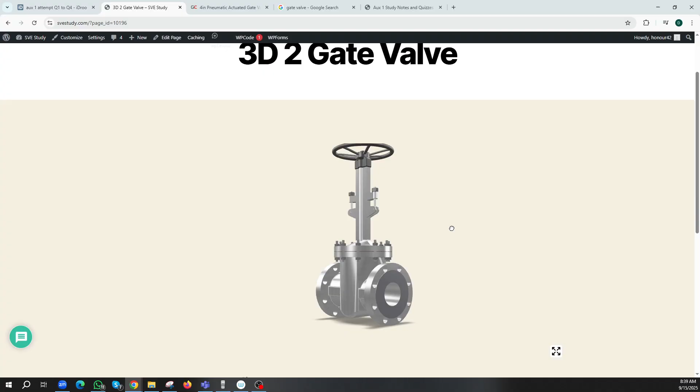I do have a gate valve on the website. You guys can't actually access this, I haven't made it public just yet. I put these 3D models up a little while ago to help us out, and I'll make them public so you can have a look. This is a gate valve. It may not be the best diagram or 3D model because it has nothing on the inside, and we really want to see the exploded version. So I didn't make it public. Also, not sure this is really a gate valve, even though it looks like one.

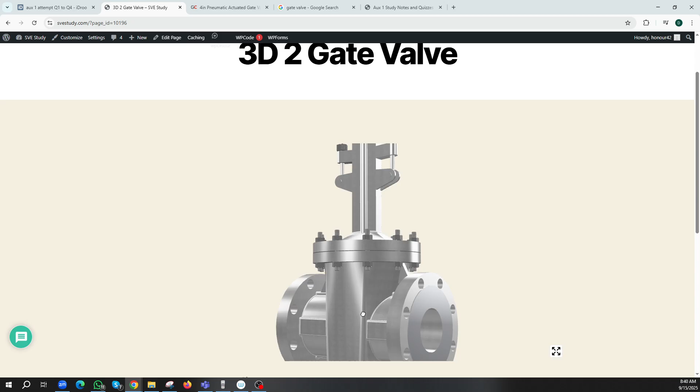The idea of a gate valve is you turn the handle and it will lift up a gate inside of here. We can't see a gate inside, so that's pretty bad. Also, is there enough space for the gate to even rise? That's my question really with this model. Not sure it's a very accurate model, so I could look around and find a slightly better one.

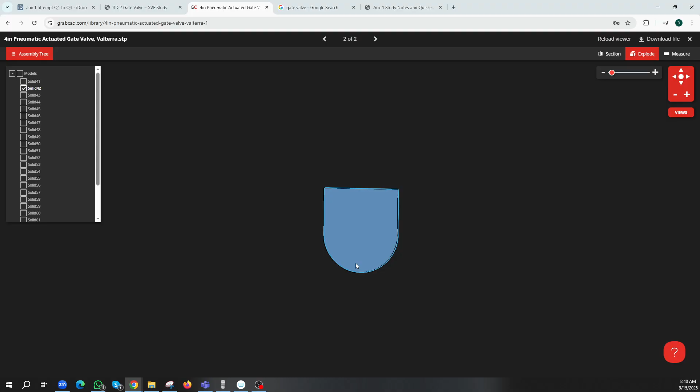Here's another one, looking at CAD drawings online, and this one's a little bit better. You can actually see it has a gate inside of it. There he is, a little gate plate. I can remove the outside so we can see that, it's literally just highlighted there. That will be the gate plate. If I can isolate that guy. There he is, okay, right. Why is it not that shape that it could be?

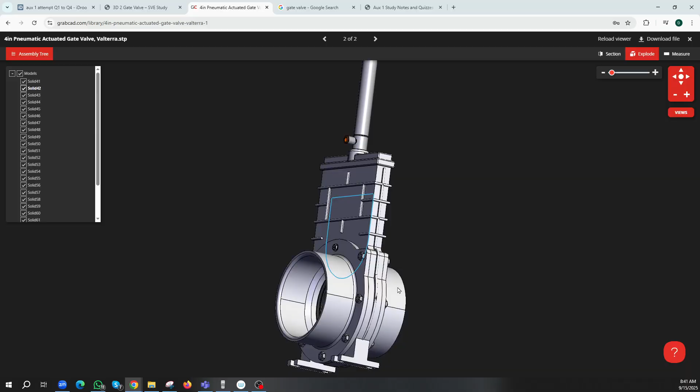You can see what's going to happen is, as this is a pneumatically actuated gate valve I think, as the pneumatic actuator actuates, it's going to pull this plate upwards, the gate up and down inside its little housing, to stop the flow of the fluid and to allow the flow again to pass through.

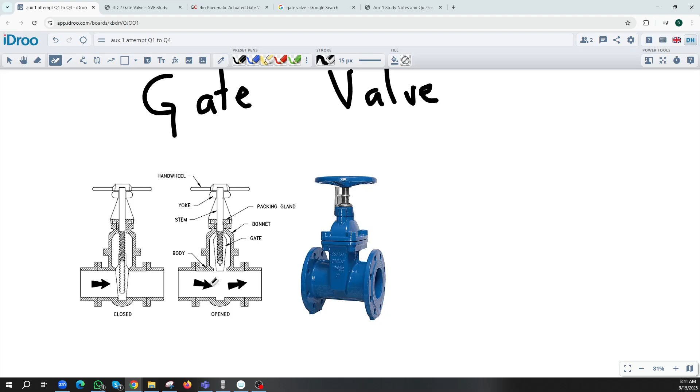If we go online and just quickly Google one, I can find quite a few. I'm going to pick out this one, I'm going to basically copy this for my diagram, but we'll try and do it reasonably quickly as well. So here's a cross section. In the exam, it does say draw cross sections. What do you mean by cross section? Do you mean cross section going longitude or latitude, across it, or which cross section? Obviously you've got two different types of cross section. I think we're going to do it like this, just cut it across so we can see the pipe work and everything. The question is, how do you draw this reasonably accurately, reasonably quickly for exam time?

So let's see if we can do that for a gate valve. I'll leave that guy on the side. It looks like, same as when I was looking on the website, this has just enough space to lift the gate up and nothing else. There's differences between rising stem and not rising stem, and we can go into that a little bit later, but the questions don't really ask that on the paper, it's just draw them, right?

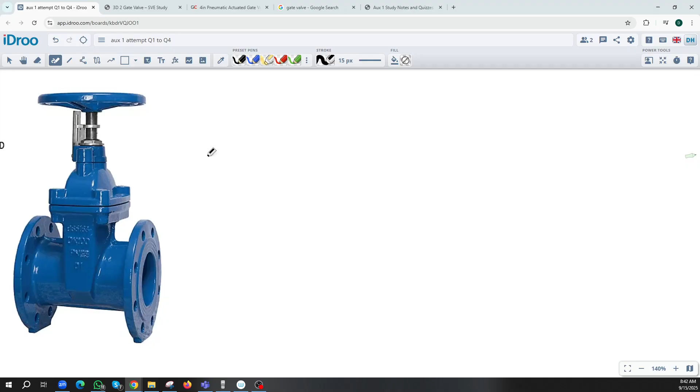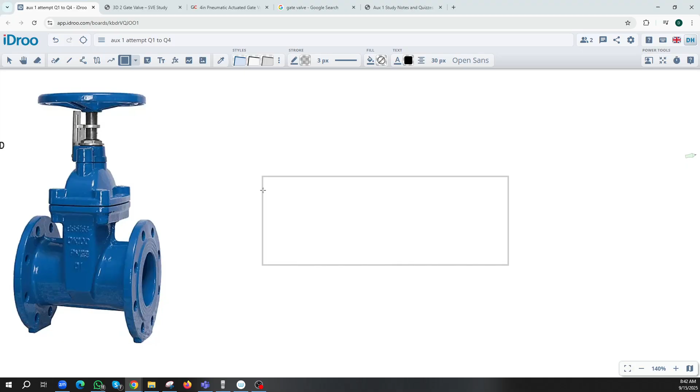So I'm going to be using sketch lines. Of course, I am doing this on a computer and not by hand, so maybe I've got some advantages. I can erase things, delete things, rub things out a little bit easier. Maybe I'm cheating a little bit by doing it like this, doing it by hand might be a little bit harder. I'm going to draw the pipe work in to start with. So here's my pipe work, this is the flow of liquid, we'll go through here. Then we're going to draw the valve body on there, just to give me some guidelines to work with.

I suppose using a ruler on all this could make it a little bit neater, couldn't it? Let's get some grid lines on here, maybe that'll make life a little bit easier. Oh, I don't know, I like it without. Okay, let's just keep it like that.

Okay, I'm going to draw the pipe work here, and then the valve body. This will give me space to put the valve inside. As I was talking about earlier, we want to be able to put a gate in here, and the gate has to have space to be lifted up and put back down again.

Maybe I can make this a little bit thinner, maybe. Again, cheating, this is just my guidelines, something like that. Let's get the gate in there if we can.

So the gate will have to block this whole section off. So I suppose it wants to be a bit wider, a bit longer than the pipework itself, so it's able to be lifted up. I want to make sure there's enough space for it to actually be completely removed. Maybe that will be okay. And then put it back down again so it completely blocks the flow.

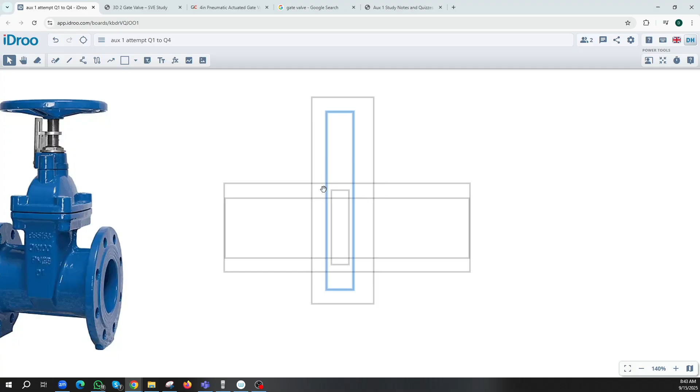Also, I want to make sure... let's make this a bit thinner because it wants to be quite tight around that gate. I suppose I could make the gate a bit thicker. Also, we might even make the gate tapered so it looks a bit like a plug.

And this is what I'm saying about people having confusion between plugs and gates. This is a side-on view, and we're literally just drawing that disc that you saw earlier. This is the disc, this is the gate here, and we're going to lift it up. How we're going to lift it up is by having a stem to it.

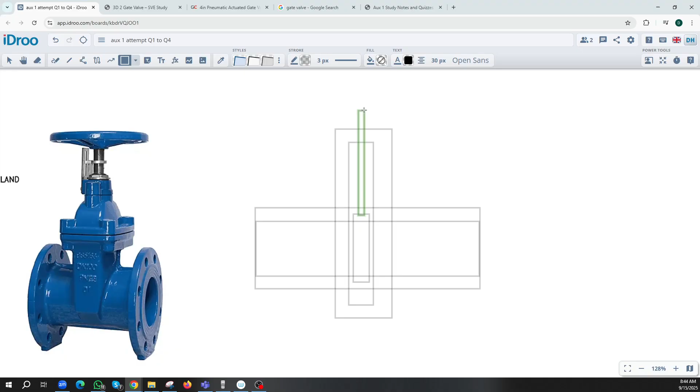So this is going to rotate. We're going to spin this around so we can draw this on. I think that should be fine.

And we could put the wheel on top as well, so we can hand crank it, like in this example here, or we could put a pneumatic actuator on there as well, depending on what the question is asking for.

So I'm going to lock all these guys together on my diagram because I can, just to show you what's going on. So as we crank the wheel, the whole thing is going to be lifted up.

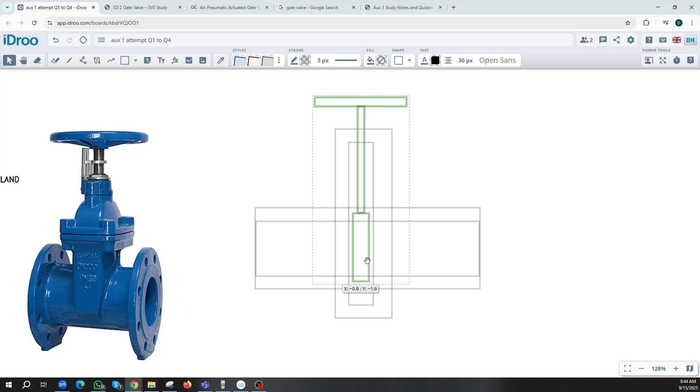That will remove the gate from the flow of the fluid, and you can see it will pass through there quite easily, and then we can crank it back down again, like this. This is the basic idea.

We can embellish the diagram with some packing, some gland packing, obviously around the seals and things like that. And this so far is not quite a very tight fit, but it's the basic idea. And like I said, I'm trying to get this done quickly in the exam time.

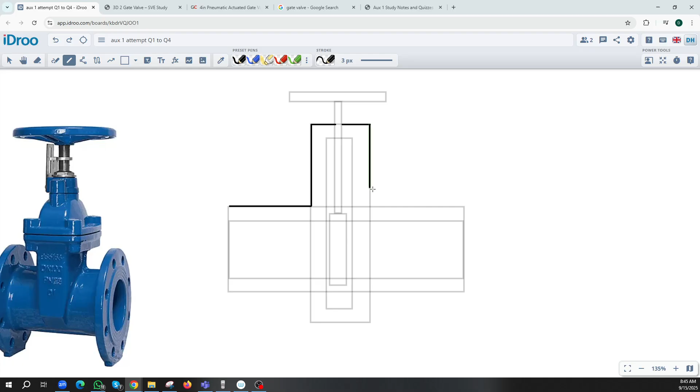So now with a dark pencil, I'm going to go over this a bit thicker, a bit darker, to draw in the solid lines basically around the outside. So this will be the body of the valve, and let's do that on the base as well.

It looks like we've got quite a large gap there at the bottom of the gate. Gonna have to close that up a little bit. I made it a bit too big, I think.

Okay, but this will be the body, and then we're gonna do the body pipe work, or the body work here, which has to incorporate this gate, and the gate has to be... well, there's two different types of gate actually.

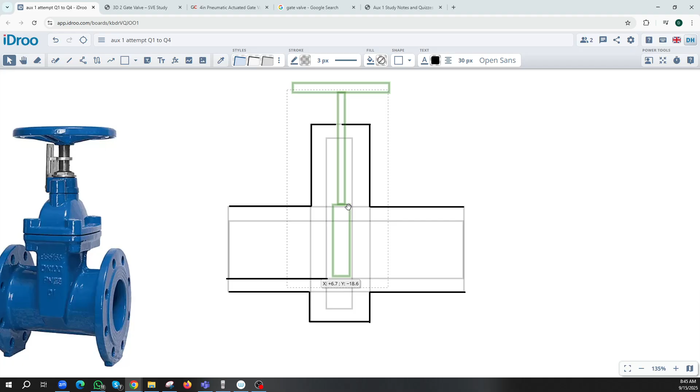We can have a solid gate, like in this one I think is being shown, or we can have a gate that has two different parts.

Oh, look at that, they do not have a rising handle on theirs. Their gate actually cranks up inside, and look at that. Interesting, there's a few different designs, and we just need one design, right?

We don't need to be too fancy about this. I'm going to make it a tapered gate, so it fits nicely and snugly into the packing here.

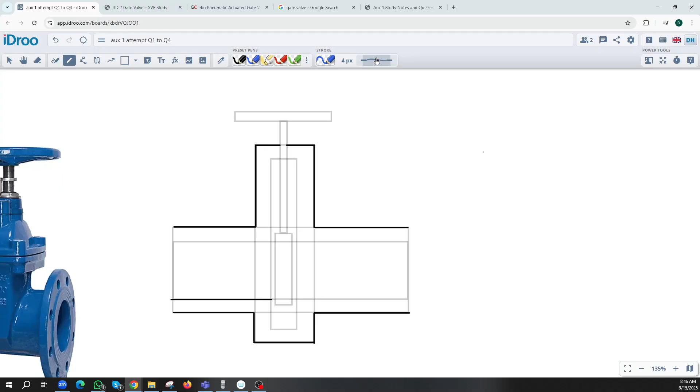So I'm going to draw some diagonal lines in here so it fits in nicely. How can I do that easily? Again, I get my sketch lines out here. Let's make these quite soft, and then I'll maybe make them another color just so we can see them a little bit clearer, so we can tell what's what. Again, you can't do this, you've got to do it all one color, but it's just for demonstration purposes.

So this will be the pipe work right here, and if I draw a diagonal line going down, I want it to be reasonably accurate. That should give us a little tapered space to build into. So let's go ahead and finish off the pipe work around here, the outer strong lines, the thick lines, and this should sit down into the seat right here.

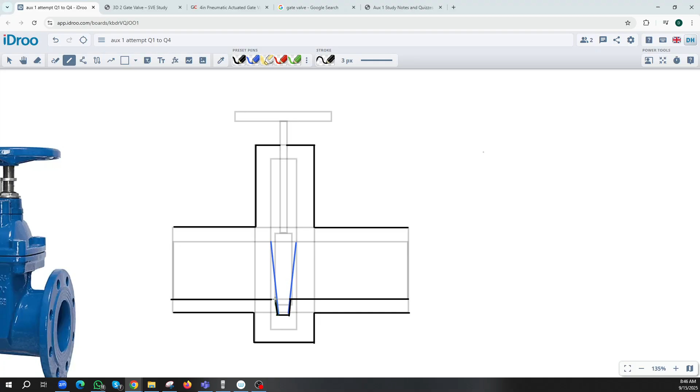There we go, nice, that looks pretty good. Let me just grab that and extend that line out a little bit more. Okay, that's looking pretty good. Not quite all lined up. I'm nitpicking, aren't I?

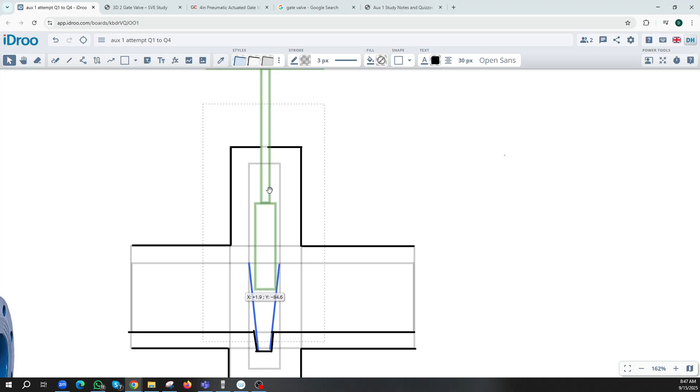I'm going to change the shape of the actual gate, because so far it's a rectangular gate, and I think I'm going to add those blue lines onto it. Obviously I can't move this in real life when we're doing the drawing, so what we'll do is just add it all together, connect it all together. Let's see if we can do that.

I think we'll be almost done on it, and then we just got to label it all up, I suppose. Oh, I didn't do this bit here as well. This needs to be a bit tighter, because this is a good seal. I can see around the base, you know, the liquid can't pass through that bit, but I want to do a similar thing on top.

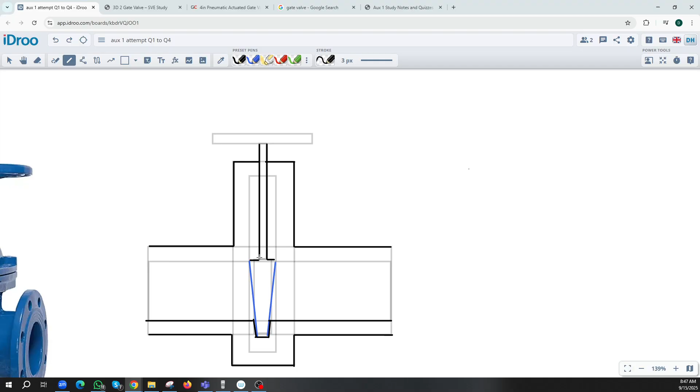So I think I put this a little bit too low. I think my gate is sitting a bit too low, or I could bring this one further down, which is going to mess everything up. So I'm just going to bring this up a bit, so we've got a slightly tighter seal in there. Like I said, this is the first video we're doing on the series, so there we go, looking a bit better. That should provide a tighter fitting here.

Looking good. Okay, let's just draw the rest of the housing. There we go. I think I can remove a lot of those sketch lines as well, because there's quite a lot of stuff going on here. All these construction lines, we can either do a lot lighter. I'll just lighten them up a lot, which is almost like erasing them. Let's see if we can make them very, very light so they don't really get in the way. Okay, that's looking pretty good.

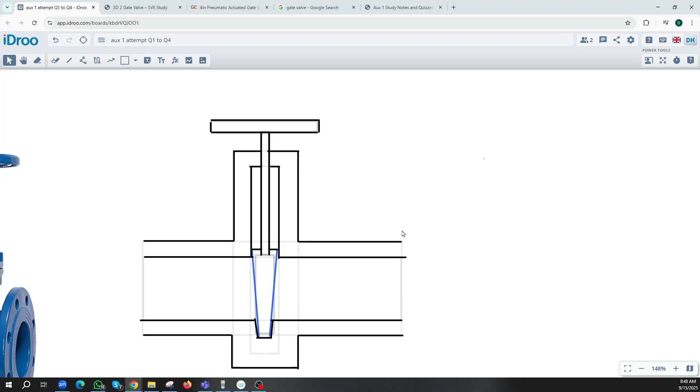If I was good about it, I could actually lock all this stuff together, and we could see what's happening as we crank the wheel. It's going to lift the gate up. There's blue lines I want to be part of the gate as well, but I've got so many bits on here. Ignore my little drawings here.

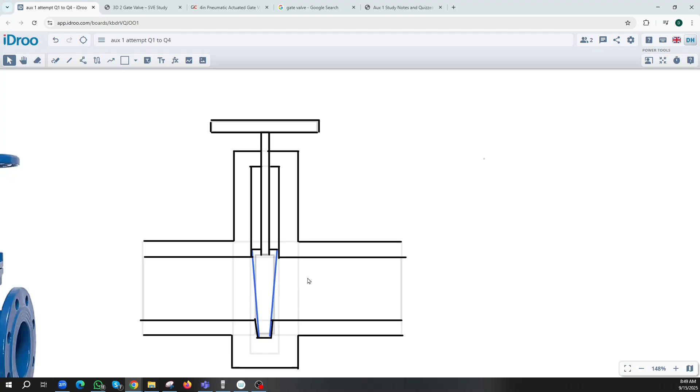Let's see if we can get all this together. That should do it. So we lift the gate up, almost, and then we put it back in place. Yeah, I mean, it has to be a static drawing, right? It doesn't have to move like mine. So, okay, I think that's okay. I think that'll do as a basic design.

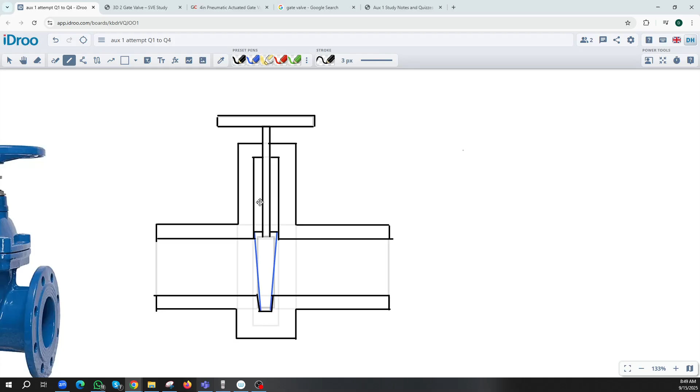We're going to embellish it a little bit now. We're going to add some extra basic labeling on it, like all this stuff, stem, gate, and all that. So we better do that. And then I might add a bit more, like it hasn't got any packing around the stem.

The stem is also going to have a screw thread on it, really, on my one, to pull it up and push it back down again. So let's just do the basic stuff, and we'll actually have a look at that. We should actually check the question for the exam to see how much detail we have to do on this.

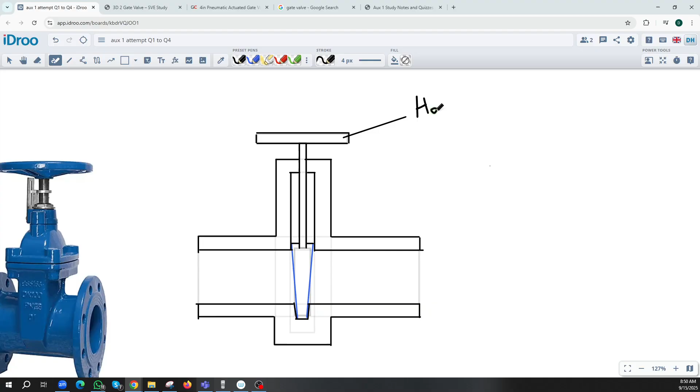So hand wheel, in my case, gate, body or pipework, because I'm talking about this stuff here. What do they call it here? They just call it body, and the top bit there is the bonnet. Yeah, okay, so this is the body.

And then this part with all the gubbins in it, or the bit you can take apart here with all the gland packing would be around there as well, wouldn't it? Or this could be gland packing, or on top we could put a separate packing, depending on how they've done it. Depends on the design, I suppose. So let's call this the bonnet.

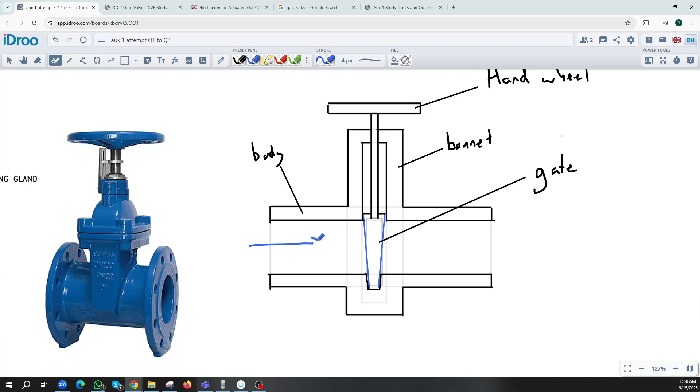And that's the basic. Do we need anything else? Oh, we should show the flow, the direction of flow of the liquid. So the fluid is going to come in here, of course, like this. We could add a bit more information, like the hand wheel can be rotated, and that we could put a screw thread on this part here as well, I suppose, so it can be lifted.

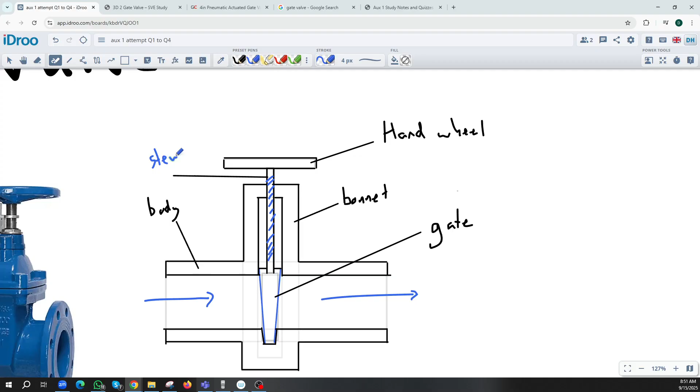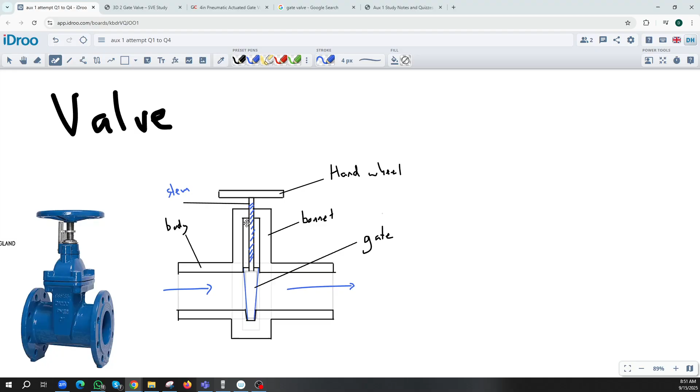Oh, we should definitely name that guy. That's the stem, isn't it? Stem as well. Okay, that's looking pretty basic, pretty much there. And then anything else we want to add will be extra details later on. But I know you guys are looking for quick, simple diagrams, so I think that is a gate valve there. All right.